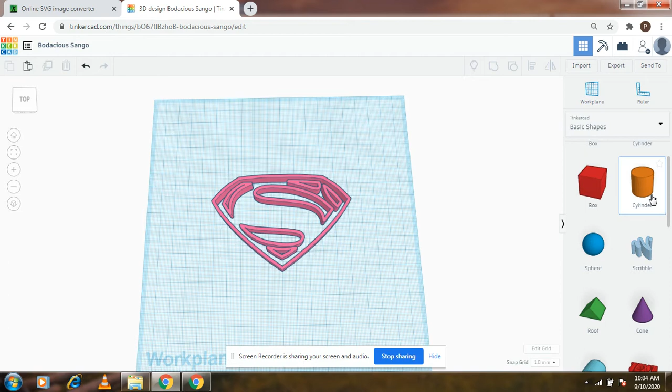So this is what the image got converted into, and this is how it looks. You can also put it on a circular base sort of. For that, just make the necessary dimensional changes.

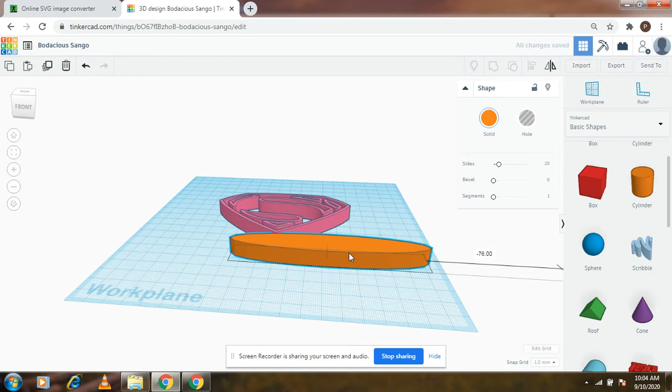We're good to go. Just increase the number of sides for a smoother finish, and lift it above the ground. Place this one right below it, so that way you can create a badge sort of.

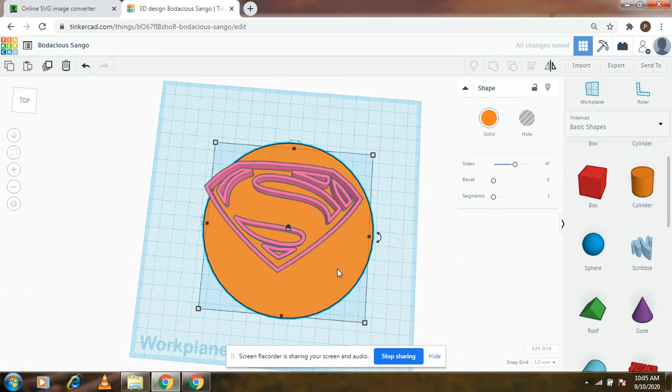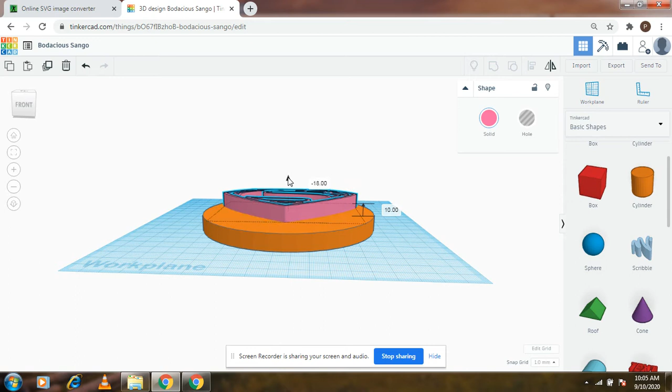Let's not rely on our settings and click on align. So we need to bring this down now, and let's just immerse it in the background.

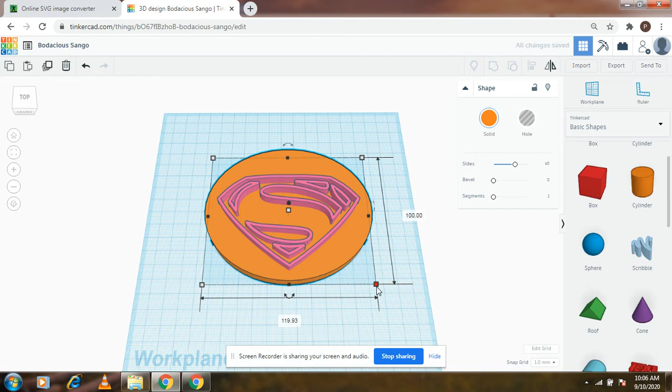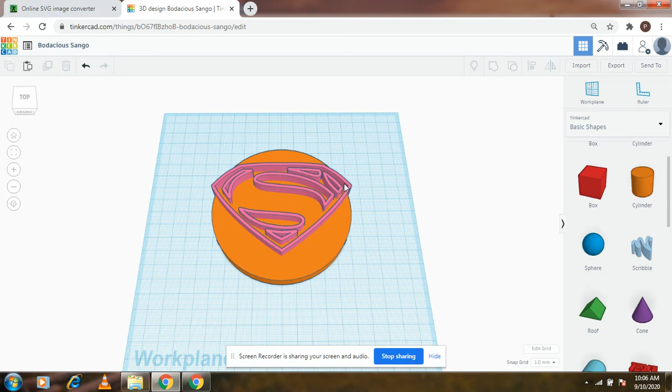If you notice, we can decrease it, let's just align them again. Okay, so the align is not working in this case. We might have to manually place it, and this tells me, okay, 110 would do fine.

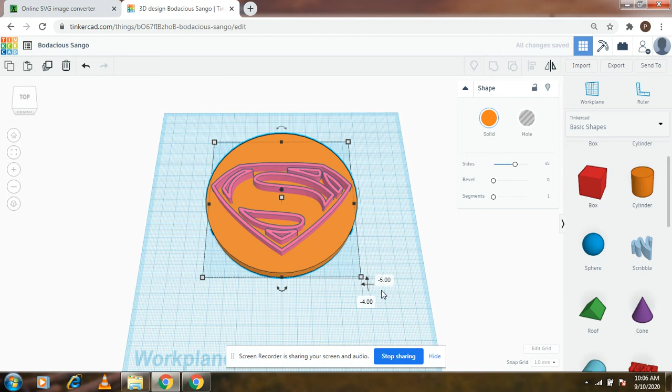This is how you can convert your 2D images into 3D printable objects.

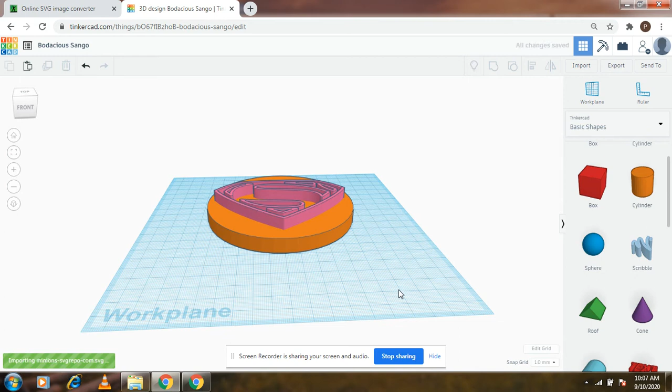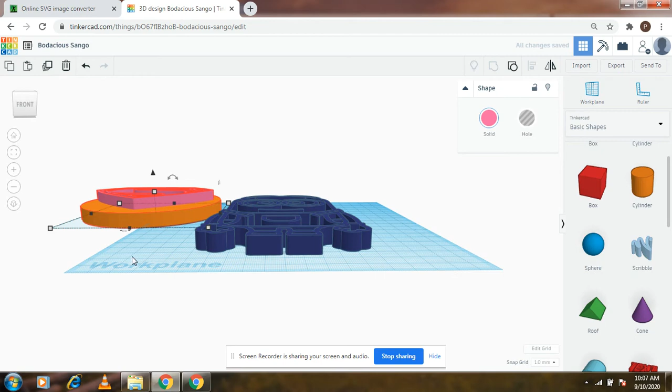Just give it some time to process. In the meanwhile, so it is there, and this is what it looks like. Let's group these two together, and this is what our minion looks like after getting converted from a 2D image into a 3D file.

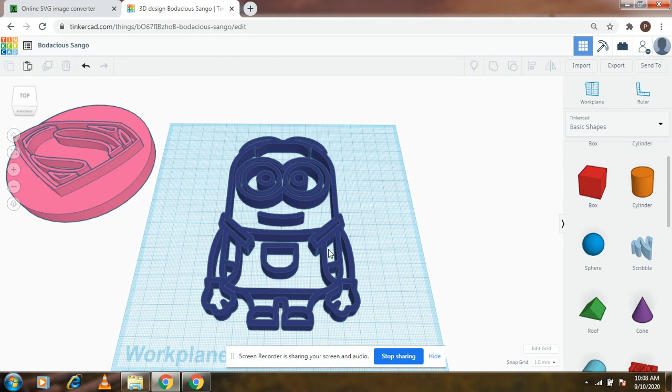So you can go ahead and try converting your normal 2D images into SVG files first, and then later import them into Tinkercad and see how the design comes out.

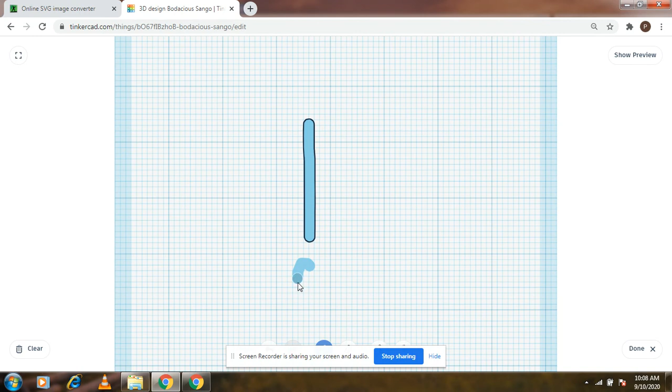There is one more thing you can do, which is the scribble feature, which means you can print whatever you draw. Now, since I'm not that steady at drawing, I'll just show you something that could be done out of it.

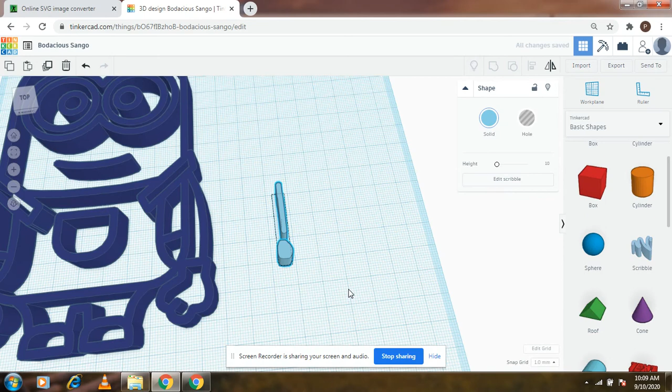Let's just watch a preview of how it is going to look and click on done. So that is something you can draw and have as a 3D object on your work plane.